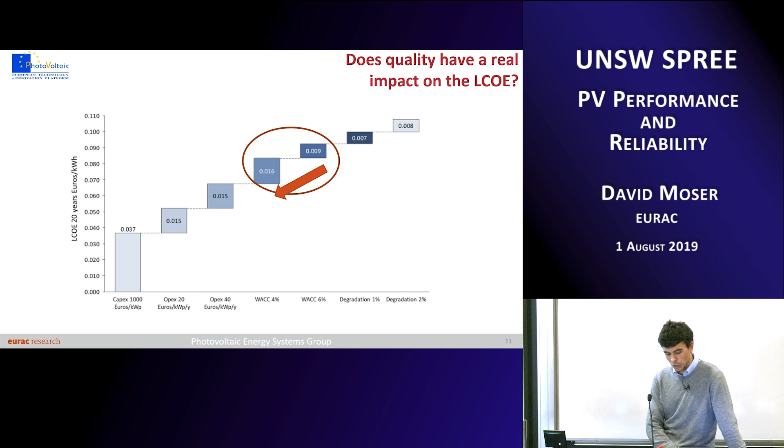We had a conference in Europe organized by the European Technology Innovation Platform, entirely dedicated to quality. The title was Quality and Sustainability of PV Systems, and you can find all the presentations online. The main outcome was that quality has a leverage effect - this is at least the feedback from the stakeholders who participated. If you have a quality project, you can offset the added cost you sustain to follow quality. Bankability is a variable concept, depending on who are the stakeholders involved in the bankability process.

There is a need of a feedback loop, and this is quite important, especially because I guess most of you are involved in upstream activities, so materials, new materials for PV modules and so on. It's very important to close the feedback loop between downstream, when the PV module is in the field, and upstream, when the PV module is conceptualized, designed and manufactured. So there is a need to reduce the gap and close this loop.

And large-scale performance data are much needed at the moment. They are kept confidential by the various project developers and asset managers, probably mainly for lack of confidence.

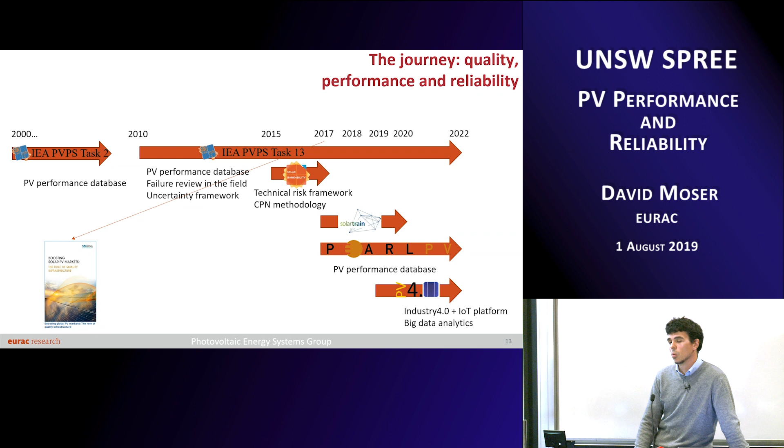Several publications were published in the past 2-3 years related to quality. One is from IRENA, the International Renewable Energy Agency, about boosting solar PV markets, entirely dedicated to quality, mainly for emerging markets. There's also a publication from the European Technology and Innovation Platform, available on the ETIP PV website, and one from Solar United, a worldwide association mostly including upstream members, for whom it's quite interesting to close the gap between upstream and downstream.

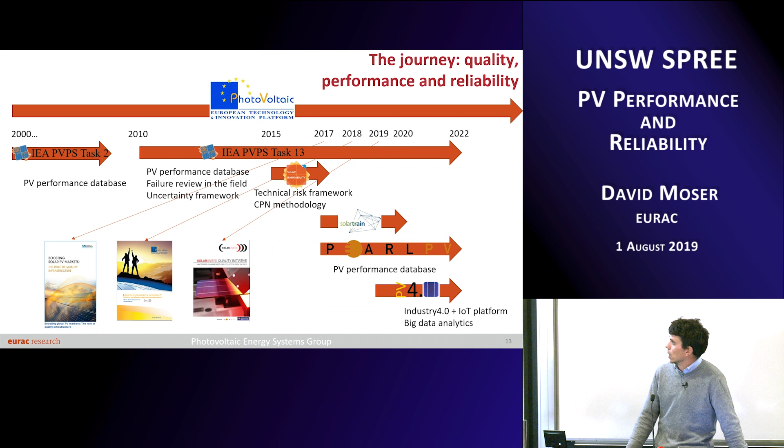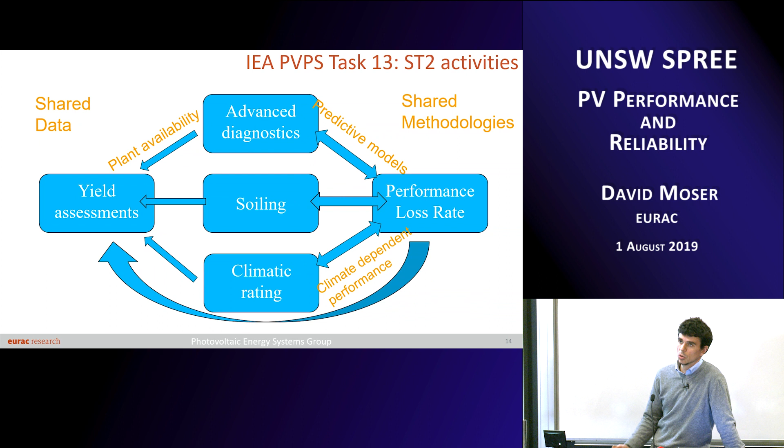Within Task 13, in the last period which started a year ago, I'm leading subtask 2, linked to performance. There we look into advanced diagnostics to reduce the time to detection of failures, or even to prevent their appearance. We look into soiling, climatic rating, and all of this is useful to improve yield assessment during the planning phase, and the calculation of degradation and performance loss rate.

Now I would like to introduce the technical risk framework we developed in Solar Bankability. I mentioned this deliverable before, review of failures of PV modules, where basically failures were described. In this deliverable you can also find how they manifest themselves, how they can be detected in the field - you'll find failure descriptions, the main mechanism, how to detect them, and an estimation of the typical performance loss due to these failures.

Interestingly, if you look at available literature focused on PV modules, the majority of returns through warranty claims is associated with what can be visually detected. So a lot of failures are probably underrepresented because visual detection only involves some primitive tools usable in the field - it doesn't involve infrared, electroluminescence, and so on. So there could be a bias in all the statistics you find, due to visual inspections.

The systematic use of visual inspection is very important because we can easily create a large data set of failures, but at the same time you need to be careful because results could be biased by the technique used. A lot of data can also come from insurance claims, which look into failures and cover the economic impact of failures.

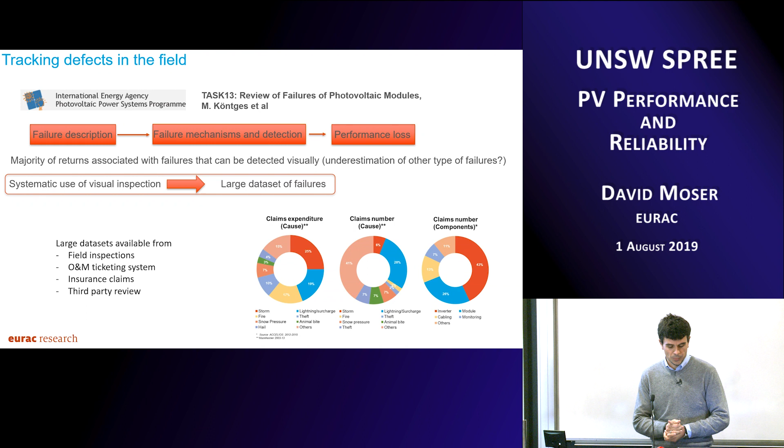So when you look into our technical risk scenarios, you start with an initial risk that you want to reduce as much as possible through your PV projects. First you need to identify the risks to be able to prevent them, then try to reduce them, then try to transfer them - for instance through warranty claims, through insurance, and so on. At the end, you are still left with some clearly identified risks that you, as a PV owner, will have to bear - your residual risk.

What we did within the Solar Bankability project - these were the partners involved. Maybe partners like TÜV Rheinland might sound familiar, as they are a very important key player in quality assurance. We also had the European PV Trade Association, Solar Power Europe, two consultancy companies based in Belgium, Accelios Solar based in Germany, and us.

The way we developed this technical risk framework, we started with the identification of risks and created what we called a risk matrix. We went through the whole value chain, from product manufacturing and testing through project planning - which involves procurement, yield assessment, and so on - through transportation, installation, operation and maintenance, to the end of life of a PV plant. What we created is this risk matrix that goes through the value chain and through the components found in a PV system.

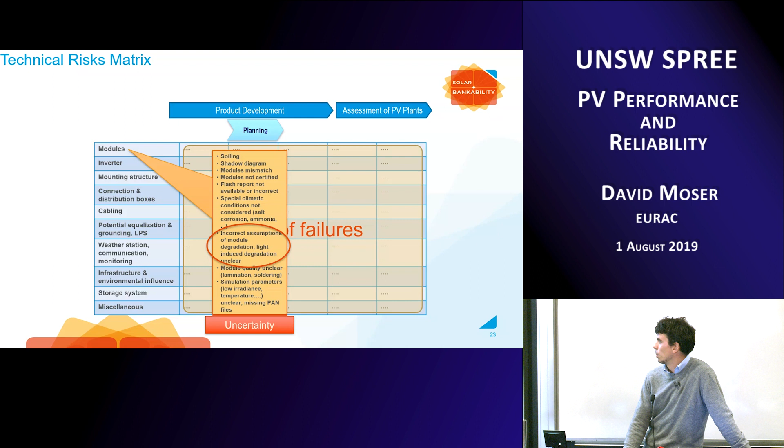Incorrect assumption of module degradation, light-induced degradation, and so on—they could be unclear, so incorrectly applied. Then, during transportation and installation, I can have some problems that don't manifest themselves immediately, but become clear in a later stage. For instance, if I have module mishandling during transportation and installation, I might not see the problems I created, like cracked cells, for instance. Those become evident later on.

So you can see that we have defined several types of risk, and also we have started thinking about how we can deal with each of them depending on when they happen. Then, during the operation and maintenance phase, we have what we call the quantifiable risk, because you have something that creates a performance loss.

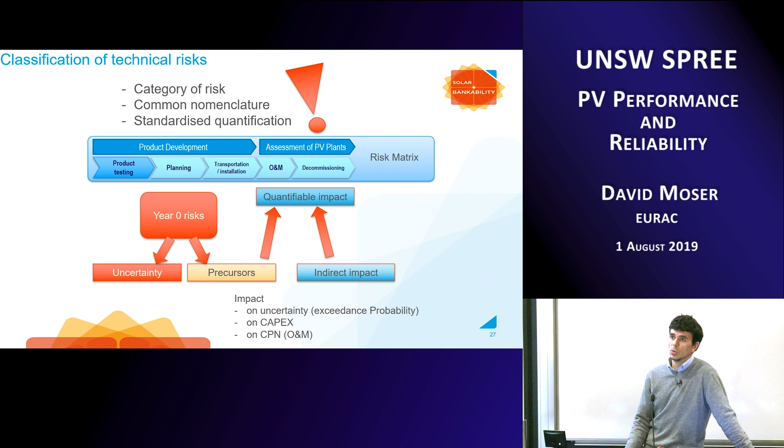So this is just to summarize all what I've said so far for the risk matrix. The important thing here is that we need to categorize the risk. We need to have a common nomenclature. We need to be able that if two operators go to the field and detect the same problem, they give the same name, because if you want to do statistical analysis on that, this is still important.

So we have to also introduce a standardized quantification methodology. So this was the first part. We identify the risk, now we want to assess them, we want to quantify them.

Typically what you do when you go into this type of analysis, you apply the so-called failure modes and effect analysis. The failure modes and effect analysis is based on three parameters. So for a specific risk, you need to define the severity, the occurrence, and the detectability. In terms of how it works, you create some tables with some scores, and then you sit down around the same table and try to agree on it.

So it's very, let's say, subjective to the group of people working on that. So we wanted to go beyond this approach—which is great—but we wanted to try to standardize a little bit more. And so we created a cost-based failure modes and effect analysis. I will go through that later.

The way we decided to quantify the risk, I already mentioned that a little bit before. So risks to which we can assign an uncertainty—they will create an uncertainty on my yield assessment. So when I have a PV project and I want to calculate the producibility of the PV plant, this will have a plus or minus a certain percentage, so there will be some risk that will increase or reduce this uncertainty range.

And then there will be risk happening during the operation phase to which we can assign a cost priority number, and I will explain what this cost priority number is. Let's focus on the first part of risk now.

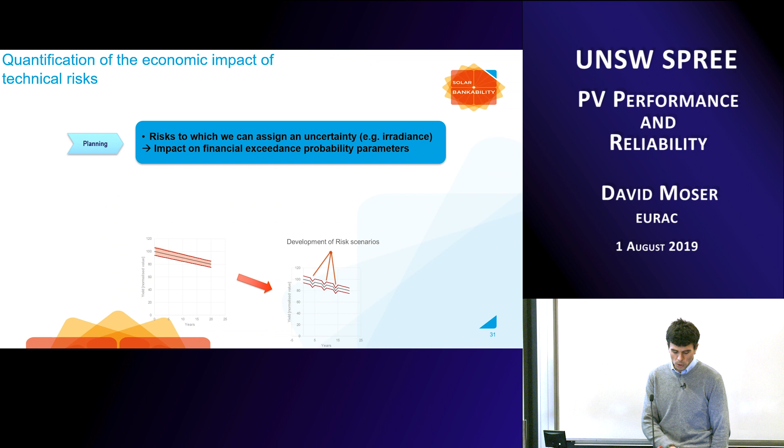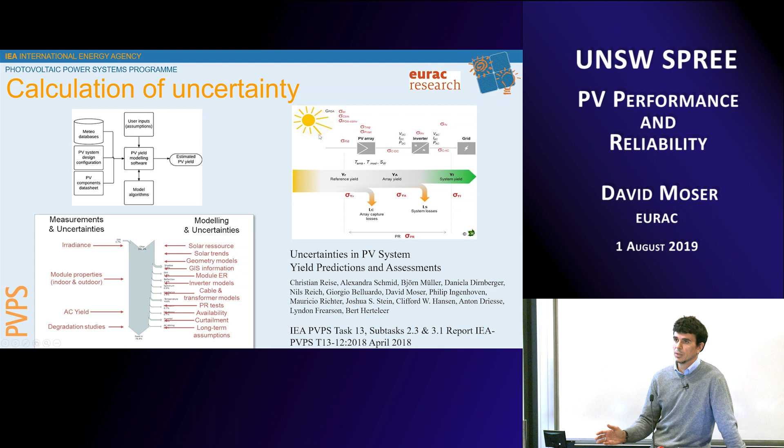Within Task 13, we published a so-called uncertainty framework. We started studying into it without providing real case studies, but we looked into all the parameters that can have an impact on the uncertainty in yield assessments. This was published last year, in 2018, and you will find all the uncertainties related to modeling and related to measurements, through all the steps of conversion between the incident irradiation on a global horizontal level, to tilt, and so on, to the production of electricity at the AC side.

If we look through the first most important one, which is the irradiance, the solar resource assessment, typically it depends a lot on the database that you choose. For the same location, you could look through different databases and you might find different values of kilowatt hours per square meter on the global horizontal level.

You will also have global trends like global dimming or global brightening, and this depends on whether in the specific site you used to have pollution or not, or if you have some sort of climate change, for example, which will also have an impact on that.

There are various studies trying to cover that, and the question is whether you should include it during a yield assessment or not, because a yield assessment for a PV plant's production has a horizon of around 20, 25, 30 years, and it will be even more in the future. So you need to make sure that if you have a global trend of increasing irradiance in your models, you need to take that into account.

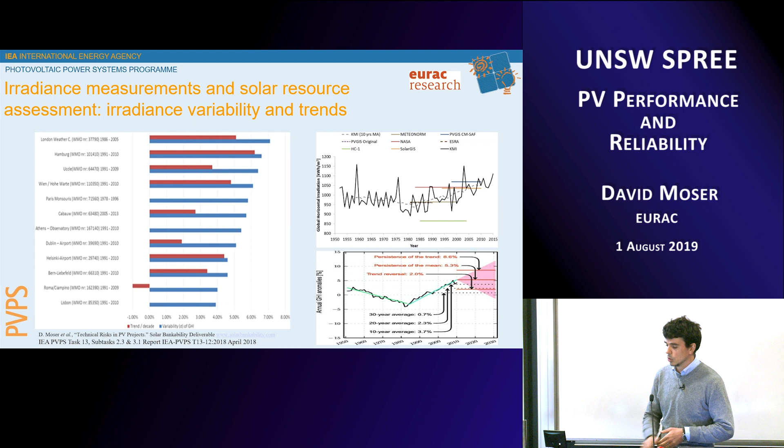Another important parameter that has an impact on the uncertainty in yield assessment is the decomposition and transposition models. Typically you measure with a pyranometer or a reference cell, or through satellite measurements you have the global horizontal, and you need to go through two processes: decomposing into the three parameters - reflected irradiance, diffuse irradiance, and direct irradiance - and then you need to transpose this into the tilt angle of your modules.

By going through these two phases, you introduce some error, some uncertainty, and it's not a given that the same decomposition transposition model performs the same in different locations. So ideally, you would like to apply different combinations of models to make sure that you can find the best one for your location.

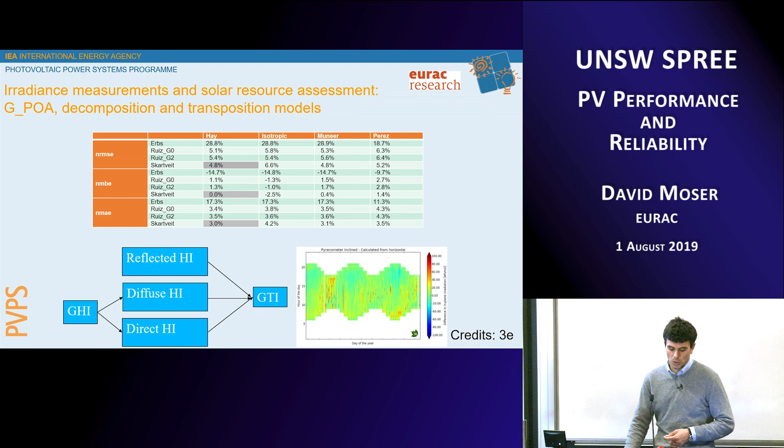Another source of uncertainty is related to temperature. In your yield assessment, you need to try to assess what the air temperature is at your location, and try to understand what the module temperature will be. Ideally, you would like to include wind speed, because wind speed has a lot of impact as a cooling effect on your modules.

Here is an example of three different modules - multicrystalline, single junction amorphous, and CIGS - that we have at the airport of Bolzano, showing how they are affected by wind velocity, so the module temperature affected by wind velocity. This is the so-called Ross coefficient that you use to calculate your module temperature if you know the air temperature. Depending on the wind speed, you will have different Ross coefficients to be applied, and depending on the packaging of your PV modules and the technology you're using.

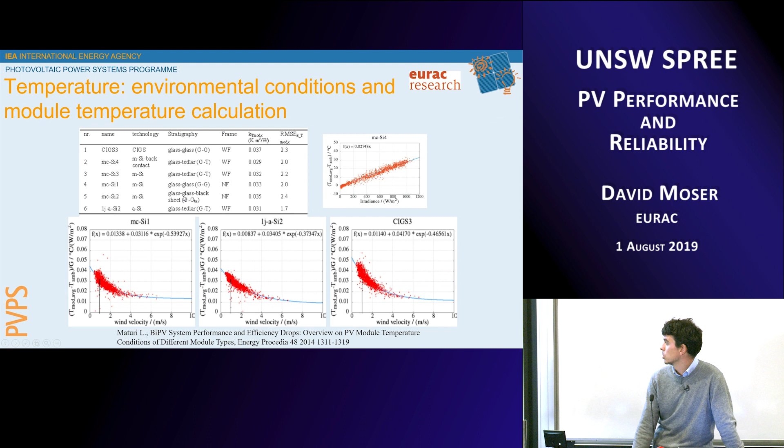Another important aspect in yield assessment is the value you include for your performance loss rate. We don't call it degradation because degradation is entirely related to material. Performance loss rate includes all the performance losses that you have at PV plant level, not just related to material degradation - it could be problems with cables, inverters, and everything. So if you only have problems at module level, the performance loss rate will be equal to your degradation, but it's not the other way around.

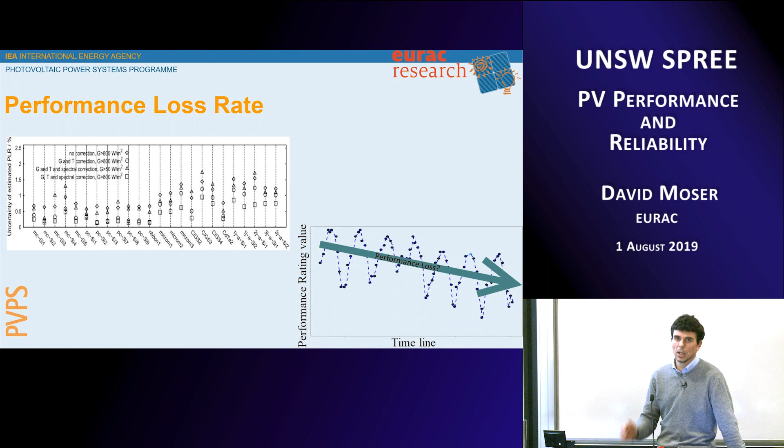Here is a study we published where we show the uncertainty of the estimated performance loss rate in percentage. A typical performance loss rate is 0.5 to 0.7% per year. You can see that the uncertainty, depending on the type of filtering that you use, can be of the same order of magnitude. So it's quite important to know that the value you include in your yield assessment could be affected by a very high uncertainty.

How do we calculate it? This is an example of a PV plant in Bolzano. This is monthly yield. We calculate the performance ratio - I guess you're all familiar with what performance ratio is. We calculate a filtered performance ratio, so you can play around with filtering.

You can only take, for instance, values at high irradiance to make sure that you get rid of spurious low irradiance values. You make sure that you have a filter so that you have synchronized production and meteo data, and you need to make sure you have the same shading condition for your modules and sensor. So you filter out all these values and you can replot your performance ratio.

You can correct your performance ratio for temperature. The performance ratio presented before is, let's say, point by point. Here, when you apply the temperature correction, you typically apply a linear regression. So this is the simple methodology.

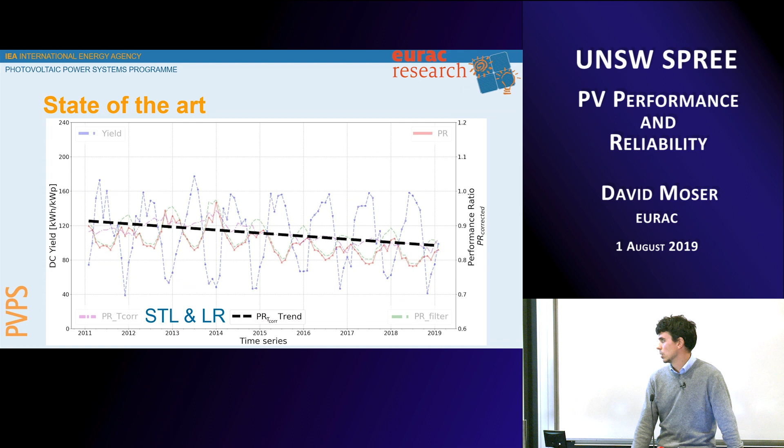You can apply more sophisticated statistical analysis, like seasonal trend decomposition, where you basically identify the seasonal trends and the degradation of the seasonal trend. For example, in this specific case, we have minus 0.88% per year of degradation.

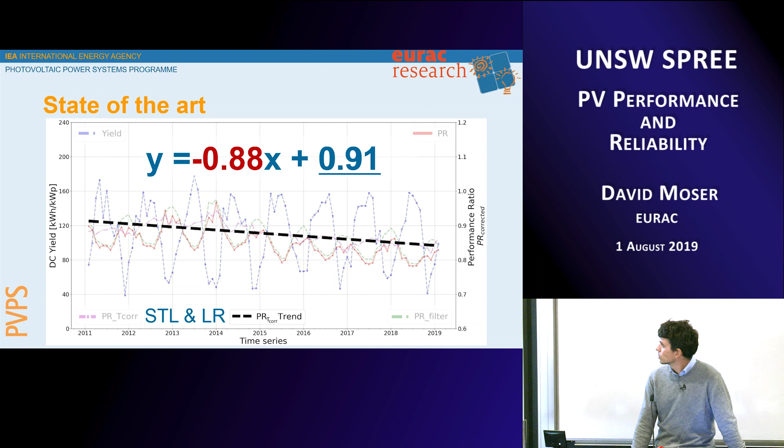And what we are doing in terms of working programs in Task 13 is that we have teamed up with several organizations around the world to look into the impact of the quality of the data, of the filtering that you apply, of the metric that you apply for the calculation of performance loss rate, and of the different methodologies.

In order to make sure we had enough data for this benchmarking exercise, we offered three types of approaches. Everyone agreed in sharing both data and methodologies, but we wanted to be as inclusive as possible, so we gave the opportunity to share either algorithms and data, or only algorithms, or only data.

So this is just preliminary results. We have applied this type of benchmarking exercise on 6 different systems so far at different climates, and this involves well-renowned research centers around the world.

Here you can see for the same PV plant in Bolzano the calculated performance loss rate and the uncertainty using different metrics and methodologies. There's no time today to discuss the details, but it's quite interesting to see how it's clustered around a central value, though we don't know what the real value is.

In performance loss rate, you don't know the real value. This could be very useful in also finding how precise you can go, how close you can go to this real value, which is unknown.

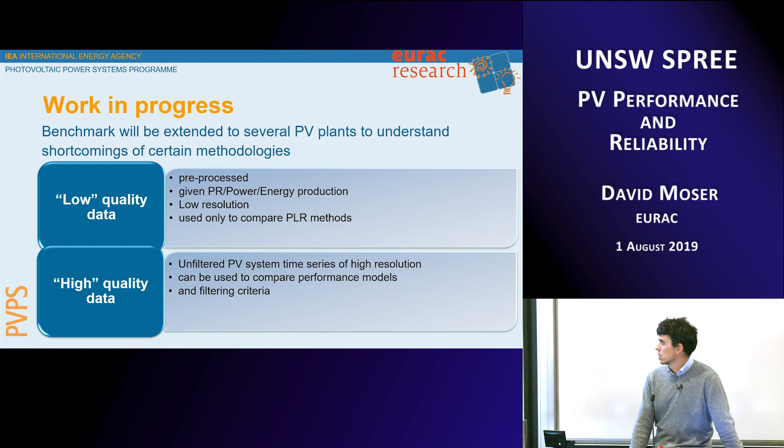Low quality data is data that maybe only has a low time resolution, like monthly data and not 15 minute or 5 minute data. But you can still gain a lot of insights looking through this low quality data.

This is the data we are working on at the moment in Task 13. We have 14 PV systems, and we know pretty much everything about those systems because they are run by R&D centers, not far from the offices, so they can be easily checked and sensors kept calibrated.

But we also have 130 PV systems, mainly located in Europe, but also a bit in the US and a bit in Asia. The question we want to answer is if we can see some climate trend.

We really want to see the difference between a system that is properly maintained. The R&D systems for us are what's properly maintained, because you have students or researchers who can go there every day to check if something is wrong. You know exactly what is happening, and you can take the outliers out.

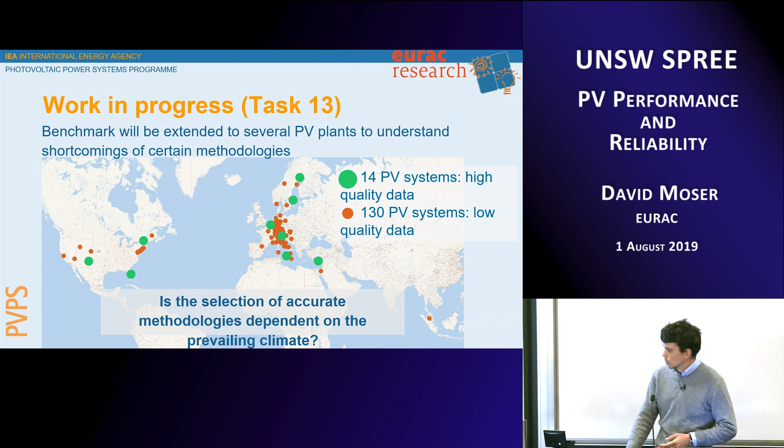Compared to the results from normal PV plants, which are normally maintained. This is just an example of a study we published at the most recent IEEE PVSC conference in Chicago. We differentiated the 130 PV plants.

We divided the data into usable and not usable. By usable, we went through the PR time series, making sure we had enough data to do some meaningful analysis. Here is the subdivision of our systems by technology.

So we have thin film, monosilicon and polycrystalline silicon, and we also have 5 different climate zones using the Köppen-Geiger climate classification. Most of these systems are in temperate climate because they are based in Germany. Without going through the meaning of every single value, you can differentiate by...

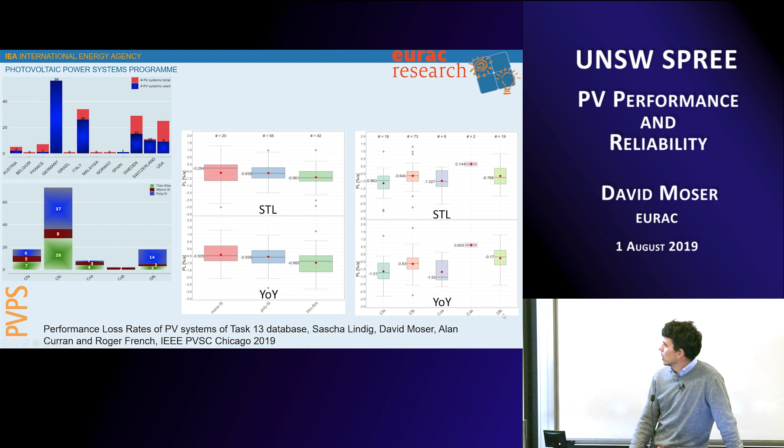Technology, your performance loss rate. So if you have a lot of systems, you could really see if one particular technology degrades more, if I associate all the performance loss rate to the PV modules, or if you have some climate variability in your result.

Within PEARL PV, we are a little luckier in terms of number of systems. We have something like 20,000 systems, a little bit more representative of the worldwide situation.

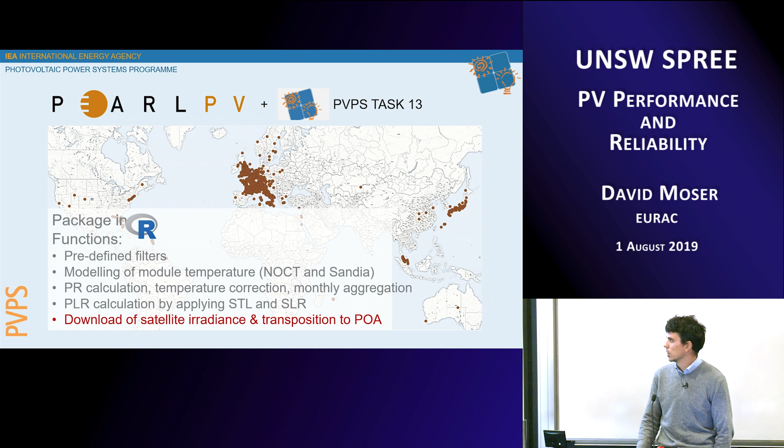And what we need to do here, because we only have production data, is find a way to collect meteo data, not one by one but through automatic treatment, downloading satellite irradiance, doing the transposition to the right tilt angle, provided we can trust the metadata of each PV plant, such as tilt angle, location, and orientation. So this is very much ongoing work.

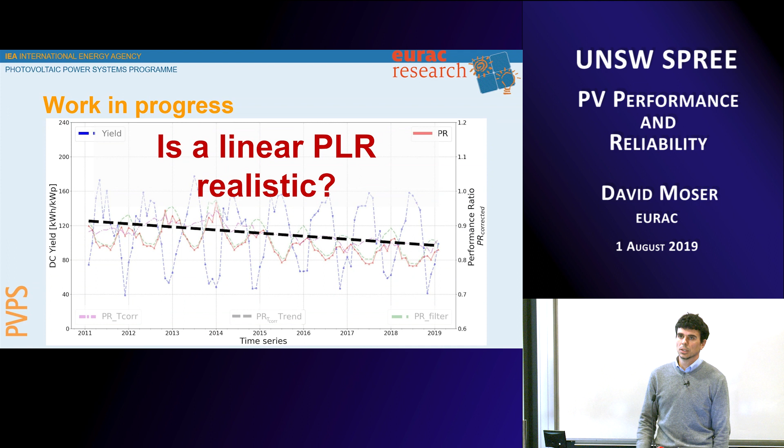The final question related to performance loss rate is: is a linear trend realistic? We started looking into one-step, two-step degradation, but so far we only treated this statistically. We want to close the gap and find a physical meaning behind it, to understand if something happened at the material level or not. So this was the parenthesis related to performance loss rate.

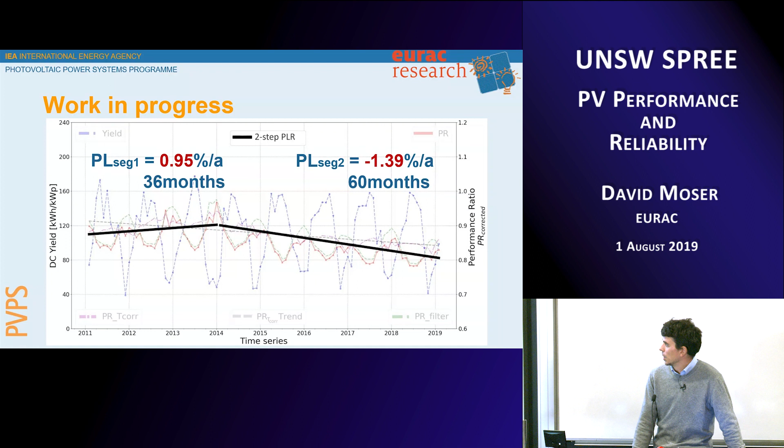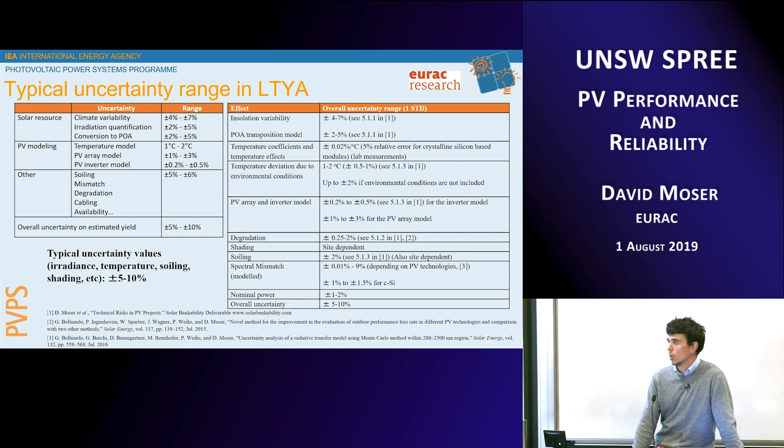Are you familiar with the concept of exceedance probability? When you do a yield assessment as a PV project developer, you go back to whoever wants to put money on it, and you typically give a value called P90. P90 tells you that 90% of the time, there's a 90% chance the value of PV production is higher than what I'm giving you. So it's a very conservative value. P50 is 50%. Depending on whether you want an aggressive or conservative strategy, you give one value or the other. How do you calculate this value?

You have your specific yield, you assume a normal distribution of your yield based on the uncertainty that you calculated, and then you take the value at 90% exceedance probability.

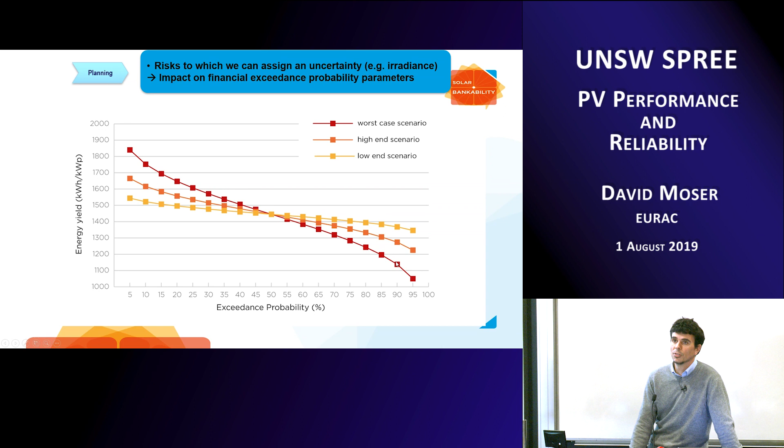Here are three curves we've done in a real case. We played around with a PV plant - we used bad quality information, high quality information, and a medium scenario. You can see I could go back to my project developer with three values of producibility that can be quite different from one another. It will have a massive impact on my business model.

To quantify it better, imagine you not only have different uncertainty, but also used a different database for your irradiation. You could have a difference between P90 values - in this case with high quality data versus a case where I chose the wrong irradiance database and had very poor data - a difference of 22% in energy. This will have a massive impact on your business model, and it could mean you won't get the project funded. At the same time, you need to be careful that you can actually trust your data, because you could be over-optimistic and reality will hit you.

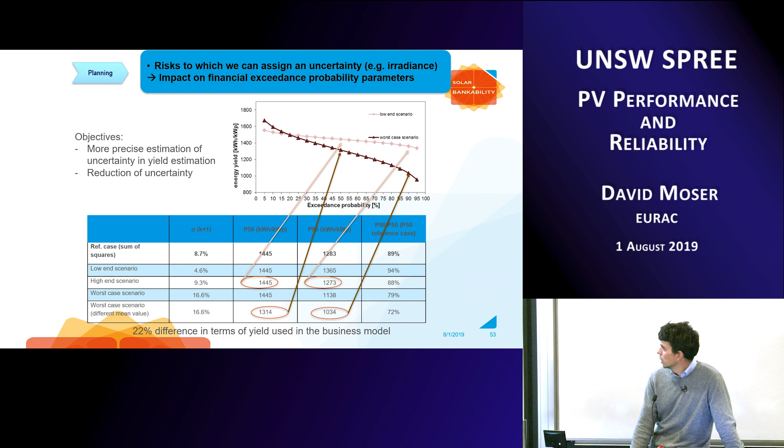So what we did in Task 13 was another benchmarking exercise, always using the PV plant in Bolzano because we know pretty much everything there. We asked partners - and there will be more in the future - Ekistica was part of it. We gave a very limited amount of information because this wasn't a beauty contest. It was more about how wrong you can get in your yield assessment, and based on that, create some uncertainty scenarios and figure out how to reduce the uncertainty. So we did this exercise.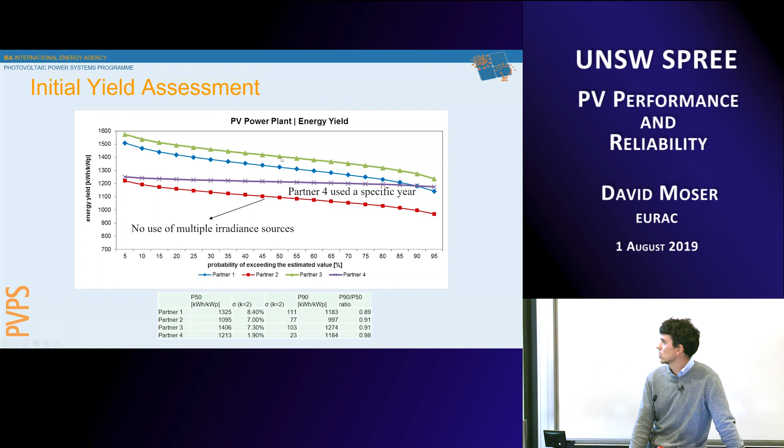Then we compare the long-term yield assessment provided by a specific partner here with real values. So this specific partner got it right. These dots are real values, averaged over previous years, and you can see there is good alignment with the P50 values and the uncertainty given by this specific partner.

This specific partner got it right because they had done yield assessment in north of Italy previously.

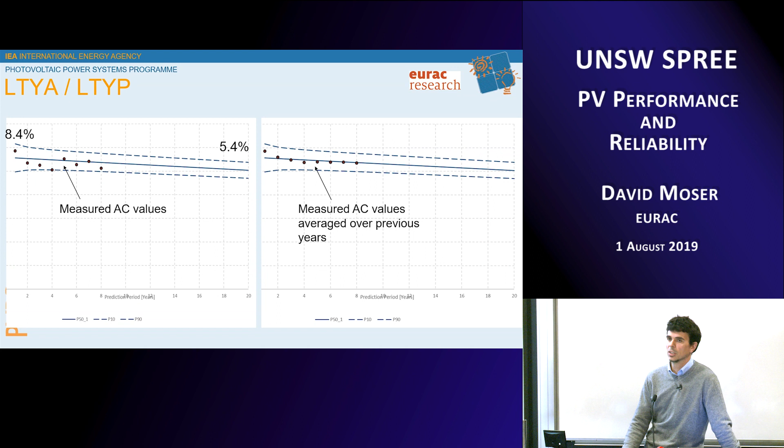So the next benchmarking exercise will be Australia, basically one of the systems in Alice Springs. We will do exactly the same things. There we expect to find also interesting results in terms of assumptions on soiling and so on.

And what we want to do then is to look into uncertainty scenarios to make sure we can explain how you can reduce the uncertainty of your yield assessment. This shows how you can reduce the uncertainty of yield assessment if you go from short time series, so if you only have 5 years of satellite data, or if you have 20 years of measured data, you can really reduce the uncertainty of your yield assessment.

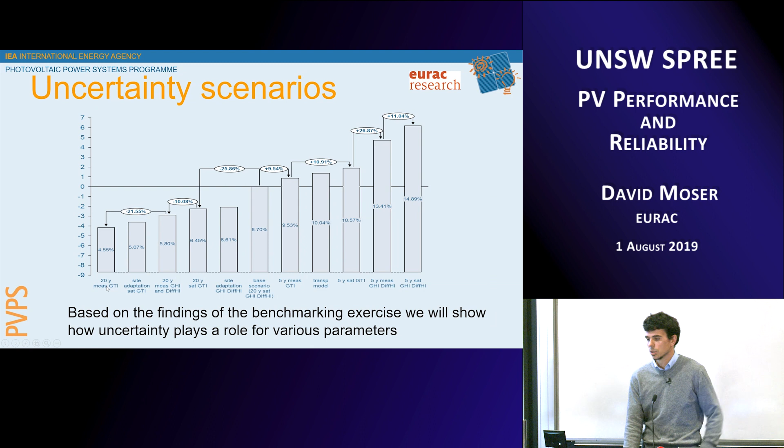So let's move on to the final part of the presentation. We assess the impact on the yield assessment. We want now to introduce the CPN methodology. So how can I calculate the impact of some problems, failures happening in the field?

The CPN has several steps, but essentially is composed of two parts: the downtime and power loss created by a failure, and the economic impact to fix that failure. Very simple. We published 2 papers in Progress in Photovoltaics. I can share them with you, where you can find step by step how it was done.

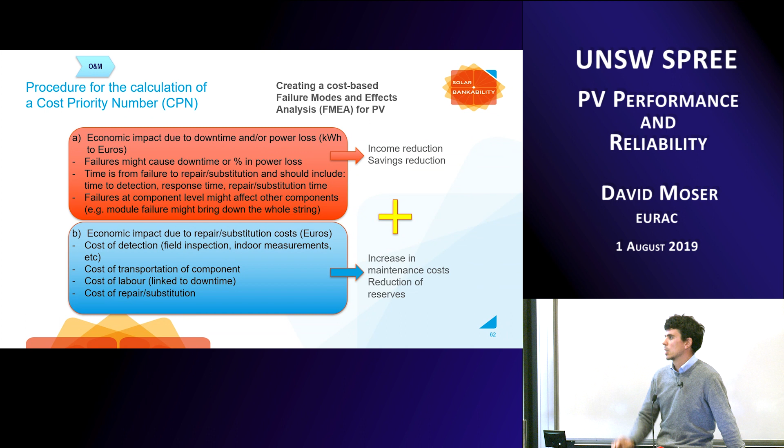We developed the methodology and applied it to a certain portfolio of PV plants by asking operation and maintenance companies to share tickets with us. In some cases it was easier because they had tickets in paper form, so we offered to transform that into electronic format. In other cases they already had their own ticketing platform, but they were nice enough to share their tickets with us.

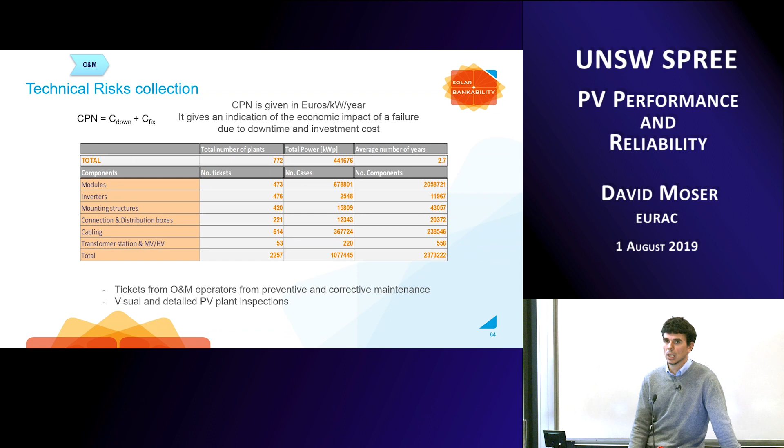So we collected something like the equivalent of 2.3 million faulty components, for a total of 441 megawatt peaks. Statistically representative, I don't know, but it's clearly a large database of failures.

We created some scenarios, some absurd scenarios. In this case it was just to create, let's say, how wrong it could get, the economic impact. If for instance you have a problem and you don't do anything about it, you leave it undetected, or if after 1 month you fix it.

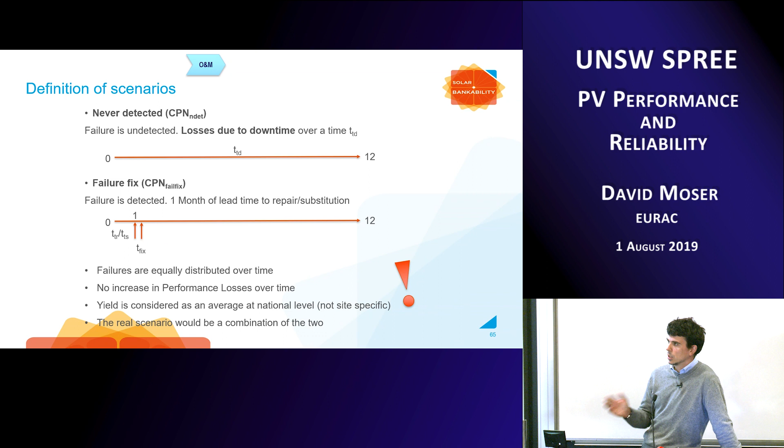We did this trying to differentiate between utility scale, residential systems, and so on. These are just some statistics. Out of all the cases that we had, we basically see that per year we have 10% of modules have problems, 10% of inverters have problems, more or less, including soiling and shading, not necessarily materials degradation, EVA discoloration, or glass breakage, or so on. So if we take away soiling and shading, this failure rate will decrease by a lot.

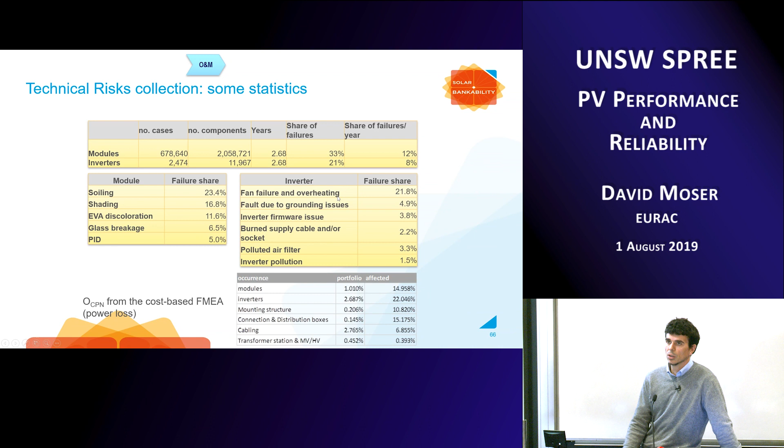Same thing we did for inverters. Main problem of inverters is overheating. We did it for all the components of a PV plant, and then we plotted the data and divided it into the cost of repairing a system and the missing production.

In case of PV modules, it's obvious that it costs more to, let's say, fully replace a PV module than to leave it there with a problem, but you need to be sure that this problem doesn't evolve in the future and doesn't pose a health and safety risk.

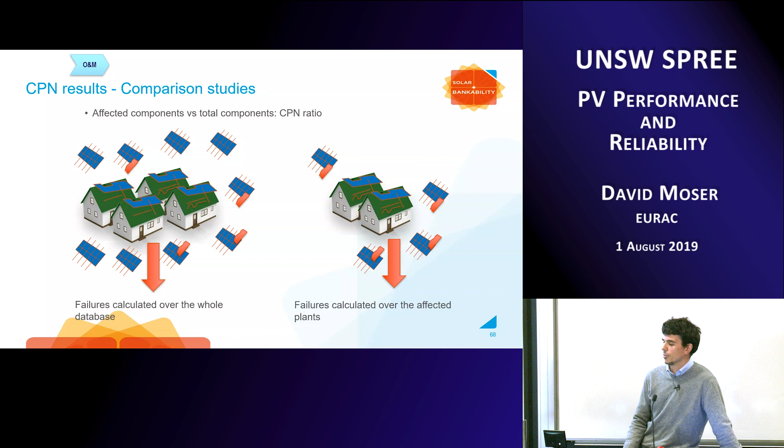We also did an analysis by, instead of normalizing over the overall portfolio, normalizing only over the affected plants. Why is this important? Because there are health and safety-related problems that do not appear often, like theft of modules, which is a problem in some locations, fire, and so on. If you only consider the affected plants for the normalization,

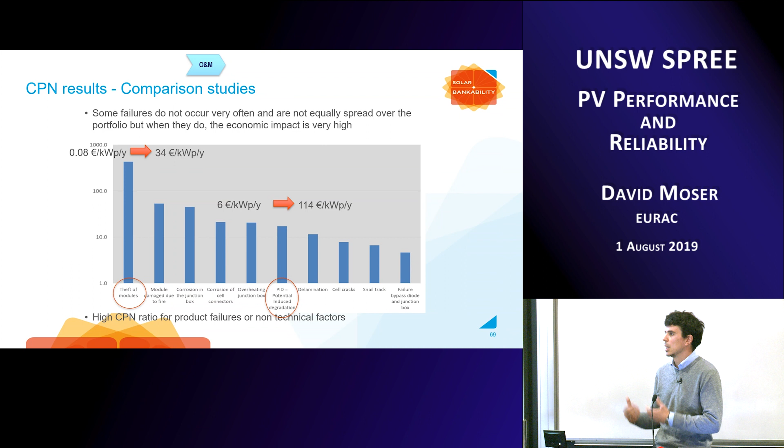then they become important, and theft of modules goes from 0.08 euros per kilowatt peak per year to 34, for example, and PID goes from 6 to 114. So when they happen, they cause a lot of problems. That's the message. We did the same for inverters. In case of inverters, missing production becomes more important than the overall cost of repair.

So this was basically the way we identified and assessed, and then we went through how to mitigate and transfer this problem. The mitigation is simple. Let's say you need to put some money on the table to do extra testing or to introduce some mitigation measures, and this mitigation measure will have an impact.

So they will reduce the risk, but you will increase somehow the capex and the opex, depending when the mitigation measures happen. We introduce a simplified methodology with 8 mitigation measures, going from preventive, before the PV plant is installed, component testing, design review by a third party, qualification of the installers, very important, and then corrective measures. So when the problem is already there, how can we fix it? By having monitoring systems, advanced or basic, by having advanced inspection or visual inspection, and by spare part management.

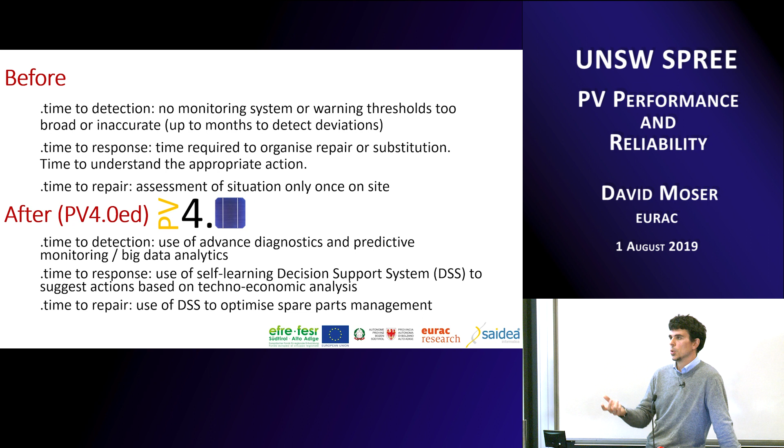Instead of assessing the situation only once you are on site, you can use the decision support system to optimize spare parts management, or to say, don't go now, go in a month's time because that problem is not so severe, so go through the next periodic maintenance.

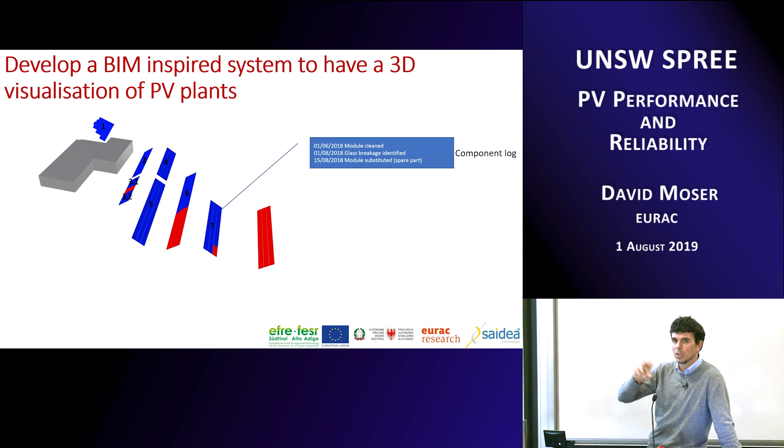And the way we envision it, you see your PV plant, you click on a component, and you have all the logging coming from different databases that I mentioned before. You will have your laptop or your tablet or your mobile phone.

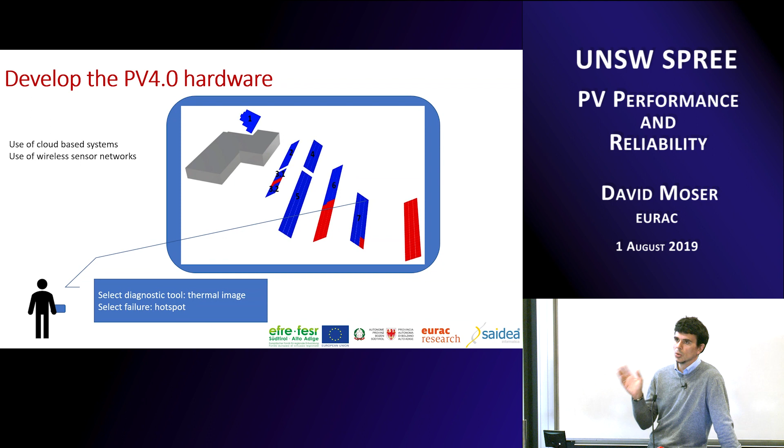You will go to the plant, you will identify the problem, you will click on the component, you will say, I've done this, this, and that. You will use a common nomenclature instead of writing in a free field. So everything will be done in order to be able to do deep statistical analysis.

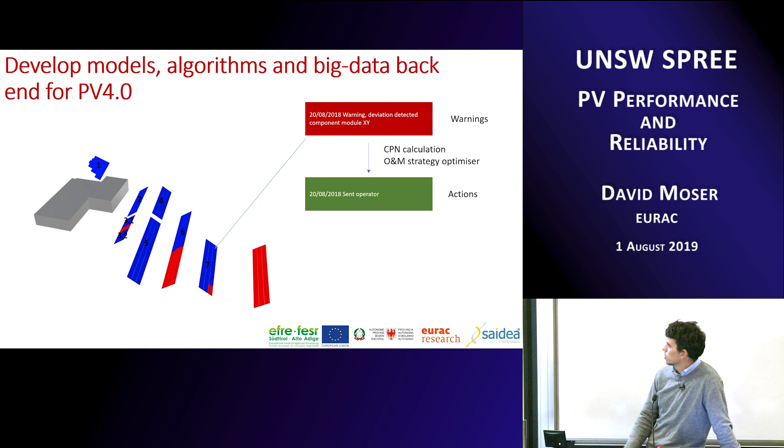For this specific case, a deviation was detected. There will be some clever algorithm running in the background using the CPN methodology that I explained before, and it will, for instance, suggest sending an operator.

And ultimately, what we want to do is collect all the databases of information that I mentioned during the presentation - data sheets, procurement data, yield assessment, quality assurance, ticketing system, field inspection, performance data, decommissioning data - into this platform provided by our ICT partner, which is called Antares.

And we hope that by doing that, we will be able to provide a new service to the sector. And with this, I thank you for your attention, and I'm available for questions if there are any.